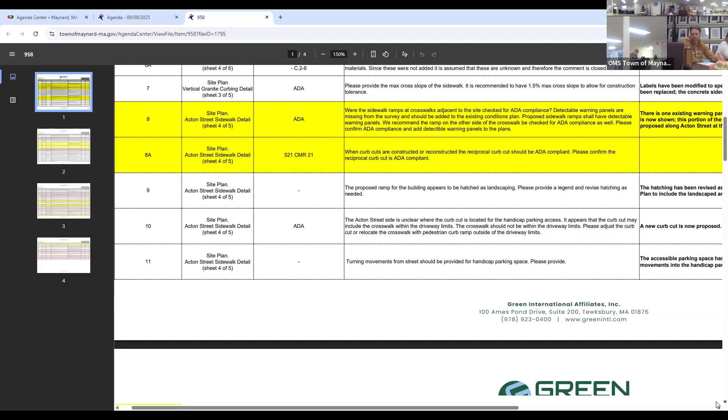We did provide that. There's a follow-up comment here. Again, I haven't really looked at these comments until right now. It's really Green saying that it appears feasible, but it is a tight space, and we have talked about that. These spaces are certainly tight.

Comment number 12 is about the zoning bylaw requiring 9 inches of gravel base and 2.5 inches of bituminous concrete. We are, of course, proposing pervious pavers, so we modified our waiver list. We are requesting a waiver to that zoning bylaw requirement now, which we should have from the start, but Green identified that item, so we added it to our list.

Comment 13, Green recommended - so at driveway curb cuts, when you're maintaining the sidewalk grade without dipping down, any driveway that comes in is going to be at some steeper slope than the sidewalk itself, because it has to overcome that curb. Our detail specifies a 15% max. Green recommended a 10% max. I don't think we need a 10%. 15% I think is navigable across that short distance. We've done this all over the place in Maynard and surrounding towns. Green's response is essentially that they recommend a 10, but it's just a recommendation.

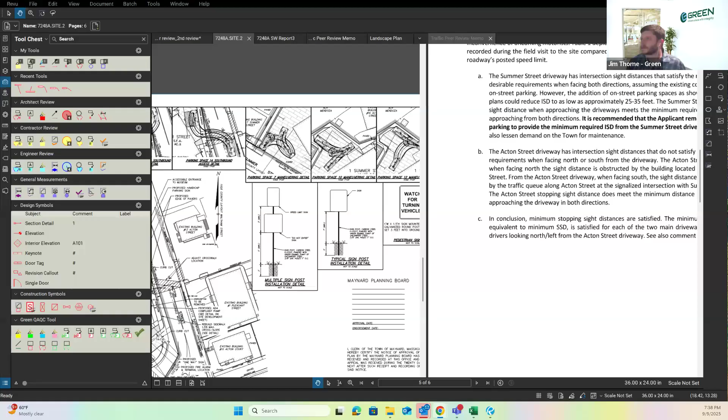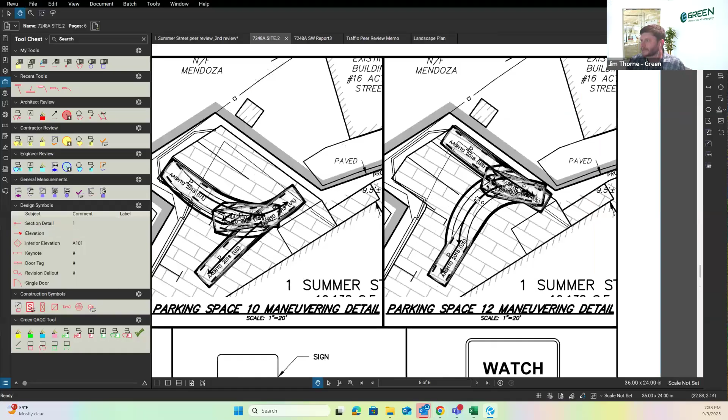Can you see my screen? Yes. Okay, great. So it's related to these parking spots. You can see the turning movement actually encroaches a little bit onto the spot, and this one isn't encroaching but is very close. Typically you need 24 feet for a 90-degree parking aisle, but here it's a reduced aisle, and this is supposed to be a parking spot. So that's the waiver they're seeking, reduced aisle width for this one parking spot.

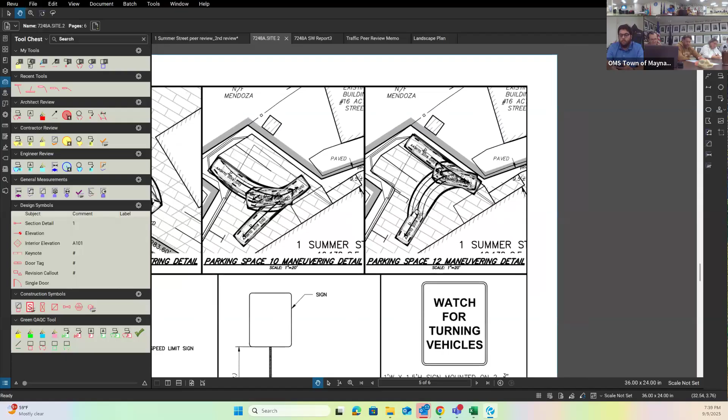Does the board have any thoughts on this item? That should have to be a compact parking spot. Yeah, the vehicle used in the turning movement analysis is 19 feet long, and there are plenty of vehicles that long. My car isn't, but... Wow, there aren't many 19-foot cars. His truck maybe, but...

I have no concern about this. I'm fine with the one spot being the way it is. Well, since we have this up, can I ask a question about that 'watch for turning vehicle' sign? I didn't really understand its placement and purpose.

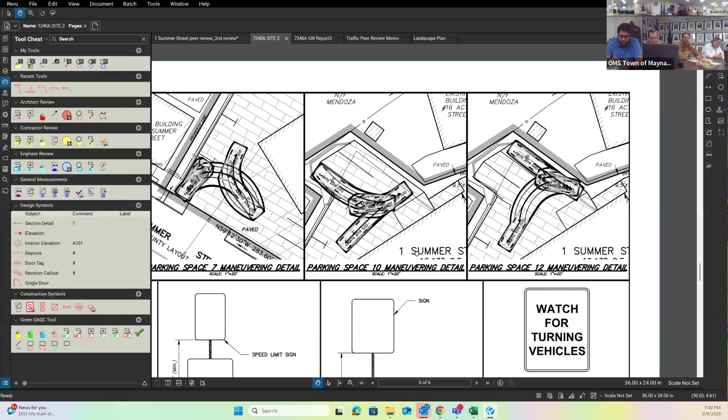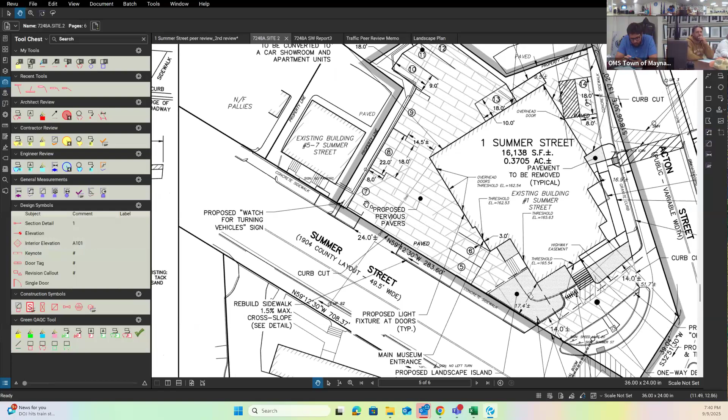Yeah, absolutely. Jim, since you have your screen shared, can you go to the area on Summer Street where we have that proposed? This is where there's a parallel space by the sidewalk. What is this, parking space 7? Zoom in more. Thank you. So the back of this spot is obviously very close to the edge of the sidewalk.

At a meeting some time ago we talked about the proximity of that, so this is what we propose to address that concern: providing some sort of bump or physical obstruction. A wall would be extremely awkward, I don't think it would look very good. Some sort of curb stop isn't going to prevent the back end of your car, which hangs over the tire, from going into the sidewalk.

From what I've seen being out there, we proposed this sign because downtown at 31 Main Street we did something similar, where the building blocks any pedestrian from seeing cars exiting the driveway. We felt this was similar, so that's what we propose. So that sign would be for pedestrians, not drivers? So it's for people walking south on Summer Street, since the car parked in space 7 might block the view of a car exiting the driveway, is that the deal?

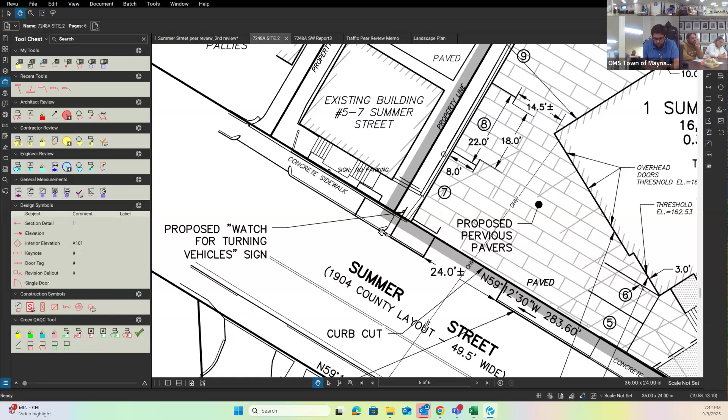It's really to alert the pedestrian walking south that a vehicle in space 7 might back up into the sidewalk. From the perspective of parking space 7, it functions similar to any parking lot, like when you back out of your spot at Market Basket. For the vehicle it's very similar to any parking lot, but for the pedestrian, they may not be expecting that as much since they're walking down the sidewalk, not in a parking lot, so maybe they're not as alert. Therefore we propose this sign.

There's no fence or anything that prevents parking spot 7 from having line of sight, right? There is a wall there, but it's not very tall. I thought it was discontinued.

Yeah, it's shorter and shorter and then it ends. We have to. Yeah, I mean this is really the end of the wall. Right, so this is just like a curve. This last one is basically in line with the front of the house.

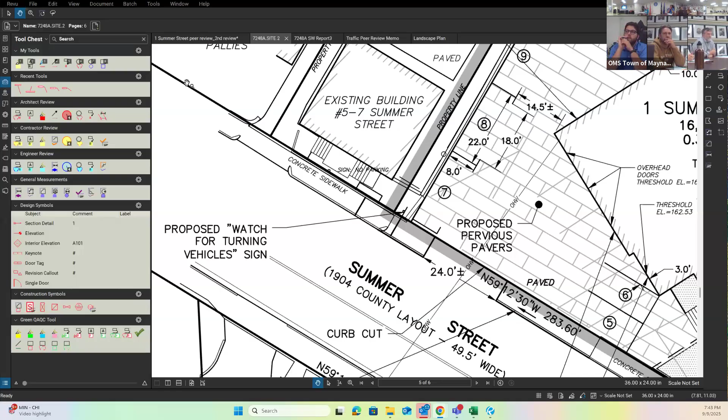So I need a bollard at the end of that space, blocking the sidewalk, or you might consider just rotating space 7 and maybe even space 8, 90 degrees and shifting the driveway down a little bit, so they're parallel instead of perpendicular to the sidewalk.

We could do that, so you mean just like we have proposed for the other one? Yeah, 7 would look like 5. I don't know if it makes much difference, but we could just put a little 4-inch bollard there. Yeah, I agree, a bollard or some sort of barrier there.

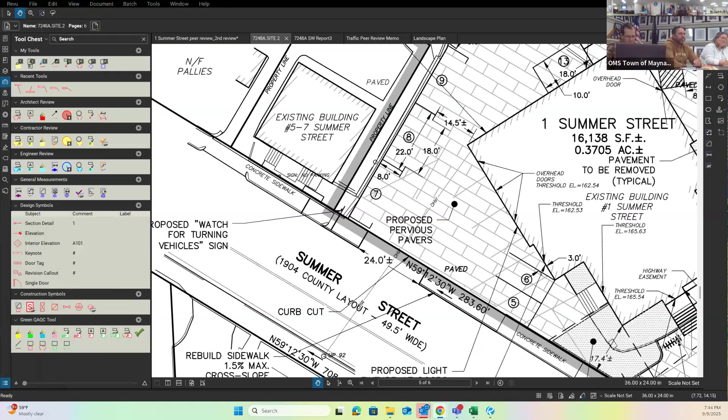Is there something preventing a bollard or something similar going in? What do you think? It'd be the safest, it sounds like it might be the safer choice. You don't have to clog up signage that people won't read anyways. Yeah, we can do that.

Jim, any advice on the conversation of installing a bollard right adjacent to the sidewalk? My only concern would be if parking space 8 is taken. I guess they wouldn't need to back out because it is a parallel parking spot, so they shouldn't need to enter that way, but they should be able to get out.

So space 7 does not abut the curb cut. It abuts a curb in the new plans, right? Yes. So it's not like 7 should be able to drive straight out, because it would go over a curb. We just want to make sure it's not inadvertent.

Jim, are you following me? Yeah, this curb right here should continue, right? Yes, yeah. And then the sidewalk would be higher, and then you have your transition piece going down to the driveway, and then a bollard adjacent to the panel that has curb.

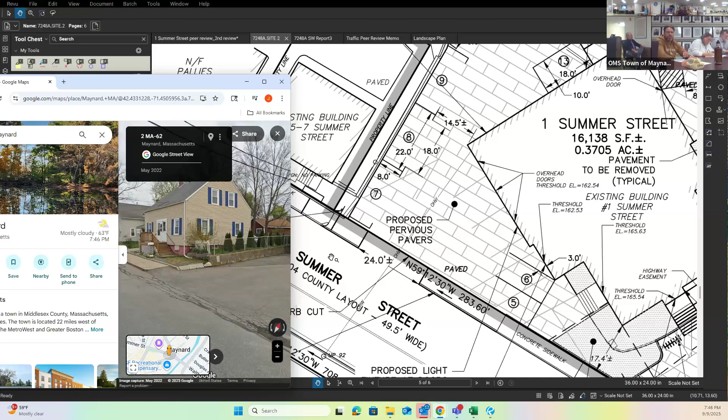Yeah, right here. Yeah, I think that makes sense to protect the pedestrians. We can have that. Sounds like everyone agrees. All right, what's next on the list? Thank you, Chris.

Scroll up. Well, all I had is just a waiver, yeah, this is to use the pervious pavers. 12 can just get added to the waiver list. Yep, I don't think it's applicable, but just add it to the waiver list. It's also complete.

And then, right, that was all one. Board, yep. Jim, anything else that requires our input right now, particularly the yellow ones? No, I don't think so. I think Bill already kind of agreed with this comment with the reciprocal curb cut.

And it sounds like, you know, test pits were done. We just need to get the information back to confirm it, and then clear the path for this. Just needed a dimension, I'm sure that they're meeting it, we just wanted confirmation.

And then the trash enclosure, I just want to see how that's going to work, just because the trash enclosure is back here and the handicap parking spot is here. So does this handicap parking spot need to be empty in order for them to access it? And how is that going to work? Is the trash dumpster linear in this direction, where they have to pull it out? I wasn't sure how the trash enclosure was going to work exactly.

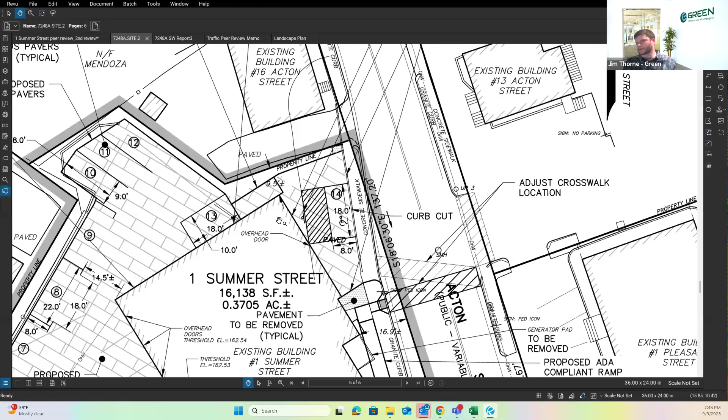So my point of view, I don't think we can close tonight. I'd rather see these things buttoned up, but I'm not seeing or hearing much in the way of challenges remaining. Does that sound about right to the board?

I wonder about that truck on the roof. What about it, the architectural view? Well, we can talk about that, but I wanted to get through the engineering comments. This stuff just seems fun. Yeah, so I don't see much pending on the engineering comments, we just need to button it all up.

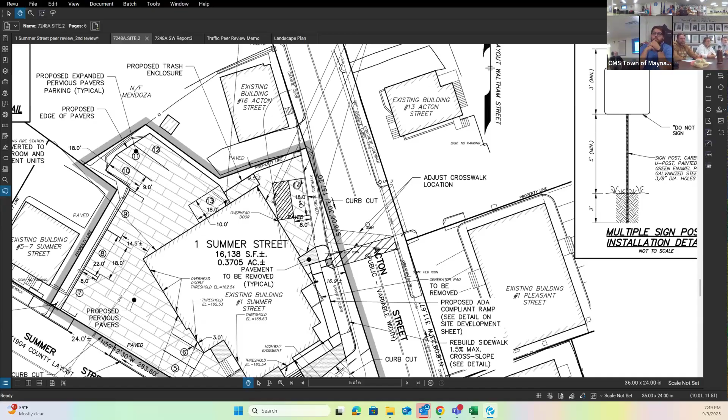And then I don't want to close, because I want time to have fire comment as well, because I think you guys should want that for the record. I already sent a request for Jim. So we get that and we get the updated stuff to Jim, okay, for the next one, that would be great. Anything else on engineering comments? I'd like to release Jim if we could, so any other questions for Jim?

Yeah, I guess I'm just curious about the long-term suitability of the pervious pavers. If you had thoughts on whether there are going to be challenges with that being able to be maintained, and whether it's a good material for this location.

We're waiting to hear back about the test pit results to see the underground soil, but based on what Paul was saying, the soil seems good for infiltration, which is good. We're also waiting to hear about the seasonal high groundwater table, which Paul said is over 2 feet.

That's good for the sub base in terms of infiltration, making sure water doesn't hold within the pervious pavers and actually infiltrates into the ground. So once we get that, we can confirm it.

But yes, there are challenges with pervious pavers, and they actually listed them in the stormwater report. I can share my screen too.

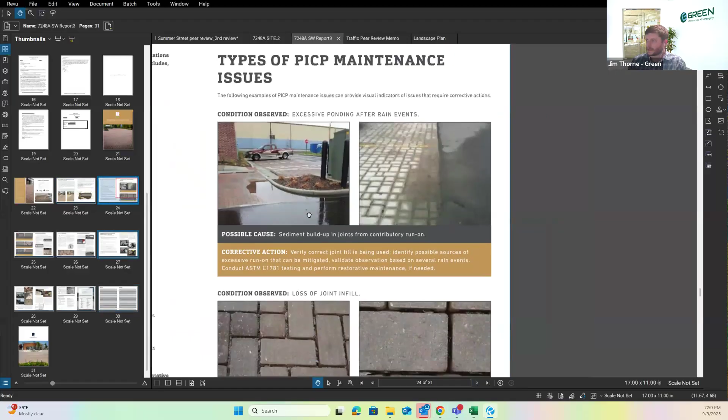There are ways for pervious pavers to fail. What they presented was, if there's offsite area that gets a lot of sediment, there's a chance of ponding and the pavers not functioning properly.

There's possible issues with loss of joint infill and settling, which can cause them to not function properly.

Here are some other issues they mentioned, like improper compacting of the subbase, which can cause rutting within it as well.

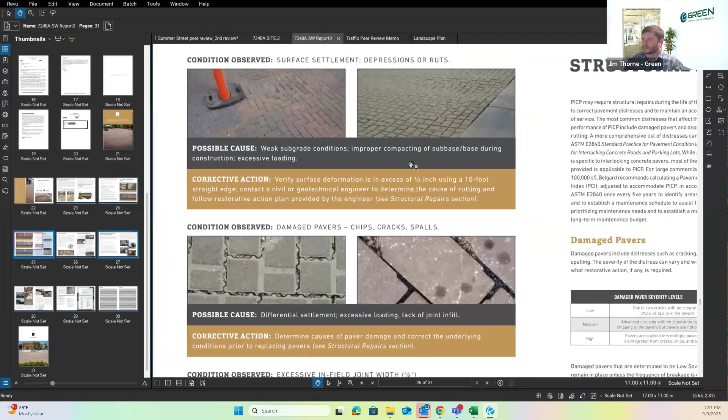This also has to do with excessive loading, but these are all personal vehicle cars, so I don't expect a lot of excessive loading here or big vehicles to be parked, so maybe there's less risk of settlement.

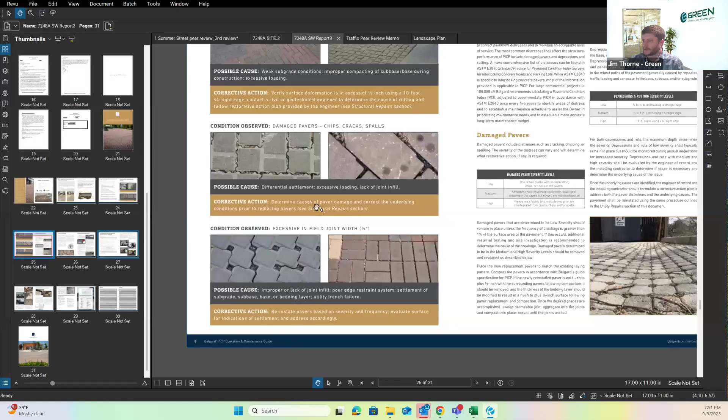But yeah, there are potential issues with pavers long term. They can settle, they can fill up with sediment, they can fail.

So you've got to really be on them in terms of maintaining them. You've got to vacuum clean them, refill the joints, and make sure they're functioning properly.

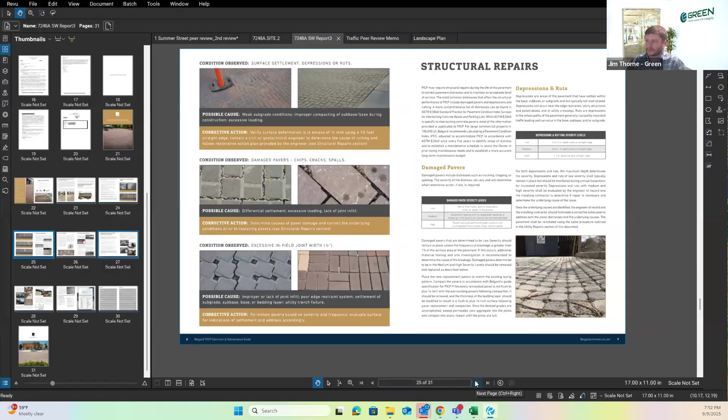A really important thing is during winter, making sure you don't accidentally sand them. Sometimes that happens.

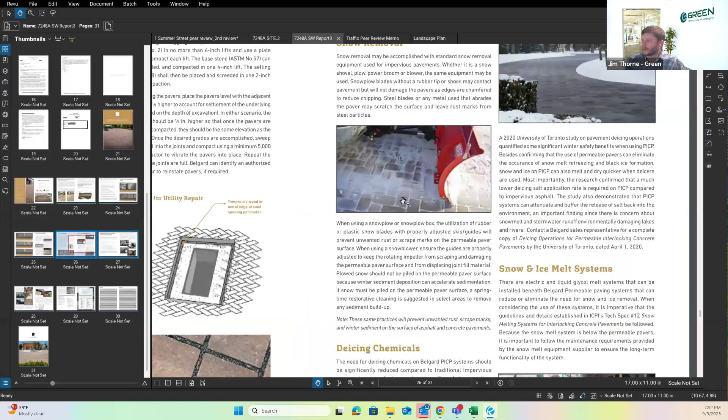Also be careful when plowing them because they are brick, so if they become disjointed at all, you can rip one out with the plow pretty easily. Make sure any damaged ones get replaced with new ones.

So there are certain things that go along with the pervious pavers.

I don't know if that answers your question, but yes, they can function properly if properly maintained and properly installed, with adequate separation from groundwater.

But long term, you're probably going to have to replace them. Like anything, you'll have to replace asphalt over time too, because that'll fail - you'd have to mill and overlay. This might be more costly to the owner to replace than normal pavement.

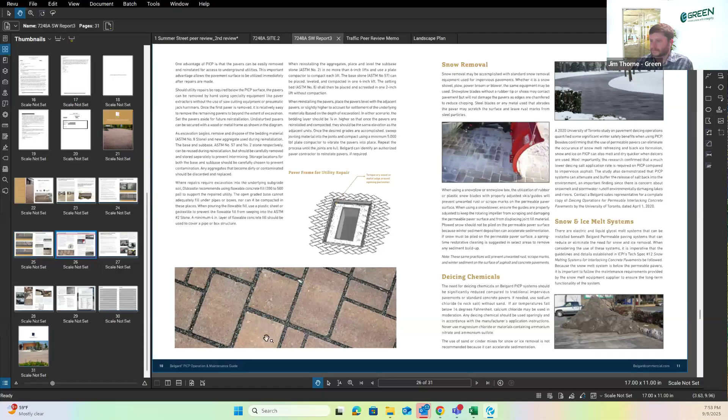I think their comment, last time I asked, was that they wanted strict adherence to the O&M manual, which was twice a year. So they're monitoring that?

Was that one of their conditions? No, they didn't say that. I think their condition was to follow the O&M.

Which is the same condition for all of our homes. I mean, that was one of their early comments, which is why the O&M you got most recently is more robust - it includes all the manufacturer's specs.

Any other comments about the engineering review?

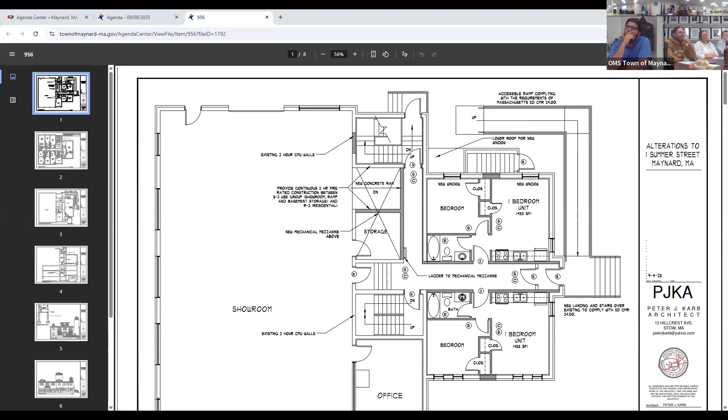What's your intention to have how many vehicles on the roof? A total of 6. Six on the roof? It's a lot, more than I was expecting.

Will that be part of the exhibit, will people be able to go look at them up there? They're on the drawings. They plan to use it for the people coming to visit the museum, so people can go up and see them. No, they can't go up there, they'll see them from the street. That was a good question. I thought that would be pretty cool, but that's probably a liability.

Up to, they're gonna be 6, hollowed out and stuff, not like a full interior, it's just like the exterior frame show. There are originals, but if someone brings their crane though, they could go look at them, they could see it before they go up. Exactly, or a drone, sure, or like a very tall person.

The only question I have, I don't remember in the RFP, there was 1 or 2 trucks on there. They're the same, there was a load of them, six of them, same. So this is in line with the RFP and the DA? Yes, very same.

The only real changes since the RFP are probably the ramp. We didn't include engineering, obviously, and the landscape plan, so most of this is the same, and some of the interiors shift around a little bit. That's important to us. Just from a, 6 cars, so from a practical standpoint, how are you securing them to the roof?

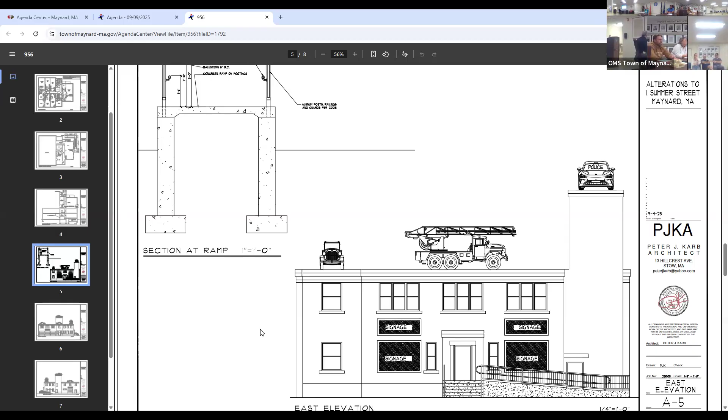Well, we landed on that we have an app. The hours of operation are like Monday through Friday, 9 to 5 or something like that - I don't remember if it was that long. But it's not gonna be manned by a person the whole time. There will be someone there some of the time, a lot of the time, depends on what he's doing. It will be controlled by some sort of self-entry system where you can sign up to go see, and it will be guided and monitored by cameras, but there will be hours in which people can access the museum within this system.

And for Maynard residents, it will be free. For others, there'll be like a small dollar amount - I think we settled on a donation. So wherever the money we get, we're gonna donate it, to the arts or something. We read all that a long time ago, I don't remember what it said, but we have it all spelled out, and it's definitely in the development agreement. We have to stick by that.

This is not a professional comment, but you should consider being open for like Maynard Fest or other things. People will like that, definitely, they'll love it. Or Maynard Fest or something - oh my god, he'll be so proud.

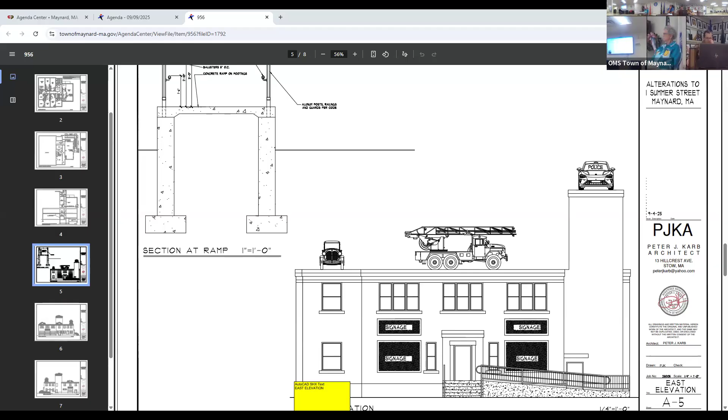There's been a couple of amendments to this, but nothing to do with hours or anything like that. Did you - about the Maynard residents being free, is that in here too, or did you just mention that? No, that was in there. Sorry, yeah, you're right, I would have to look at it. If you saw it, then - I saw it and I didn't see anything else, so...

My kids are very excited to go. Oh, I'm excited too. That popped up the first question.

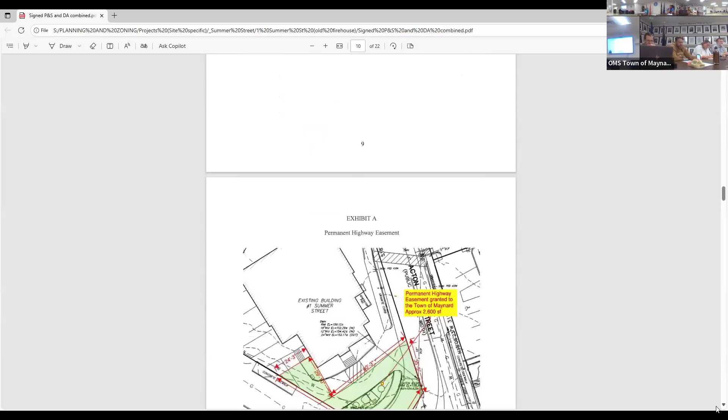Chris, the thing that might be helpful to speed things up would be if we went through the criteria for the special permit, and we do need to finish the conversation about the public contribution - originally it was parking spaces on the roadway, which is challenging for many reasons. We talked about removing meter heads, which I believe DPW said would be challenging for other reasons, so we do need to find a way to meet that criteria.

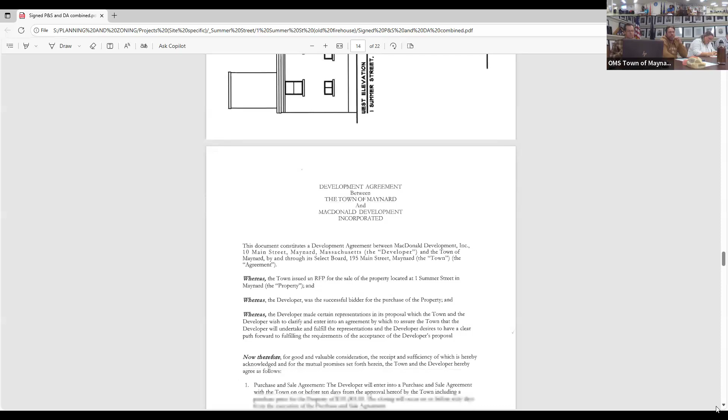Here it is. Okay, I'm sorry Chris, did I interrupt? No, can you just zoom in? I'm just saying we need to meet the criteria for what we were discussing. So this is...